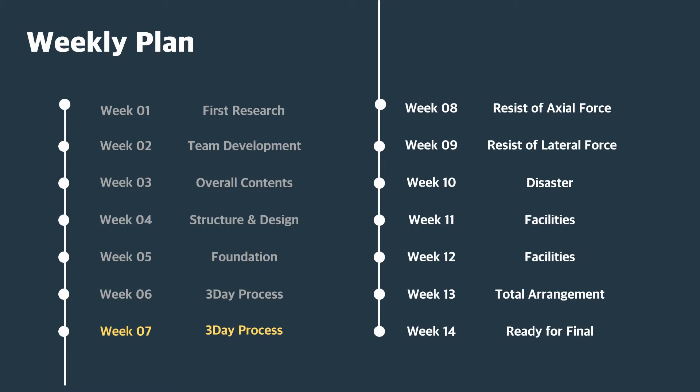Last week, we told about the 3-day process, covering day 1 and day 2. Today, we will present day 3 and the problems encountered when constructing.

This is a summary slide. Last week, we presented the background of the 3-day cycle and the construction method of day 1 and day 2. When constructing a high-rise building, they need a lot of manpower and equipment, so they need a lot of cost per day. Projects should be completed in a short period of time, so a new construction process was needed.

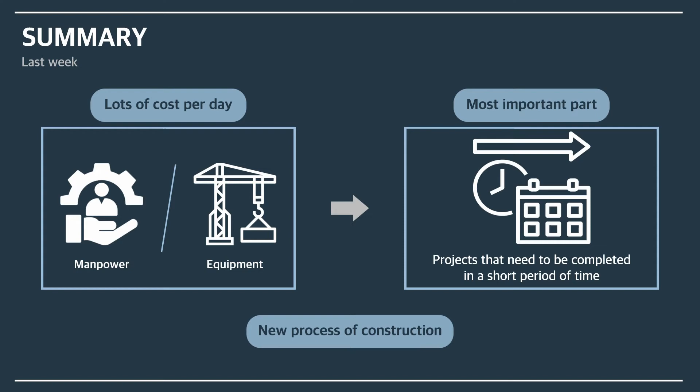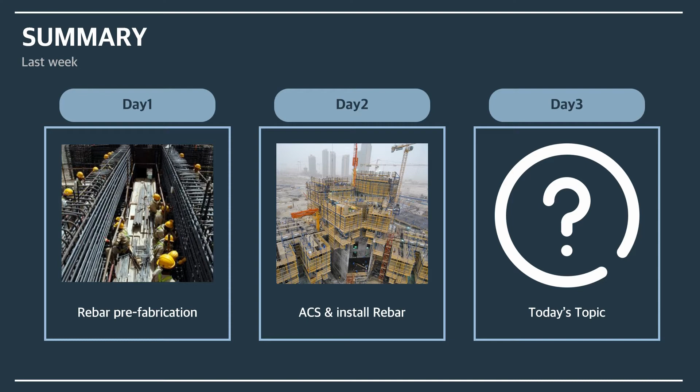As a solution, Samsung C&T's 3-day process was used. This process constructs one floor every 3 days. In day 1, rebar is prefabricated on the ground. In day 2, the rebar made in day 1 is connected and molding is installed using an auto-climbing system. Today, we will present the final course of day 3.

In existing high-rise buildings, they use the winch transportation method, which raises a container of concrete to the middle floor and then uses a pump to send it to the site. This technology was stable, but it took a long time.

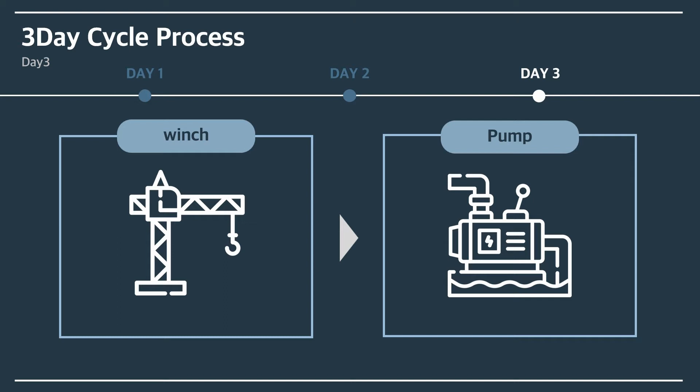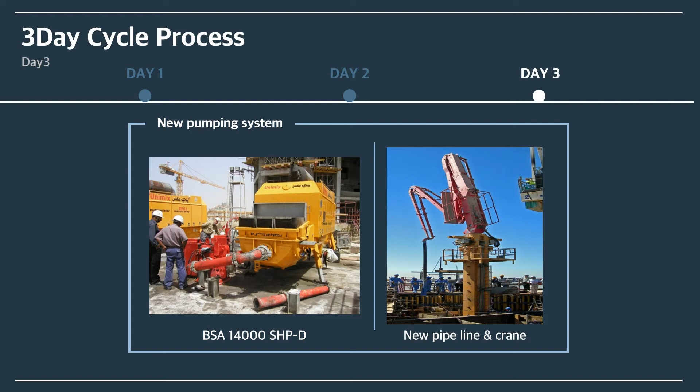Burj Khalifa had to shorten the construction period due to problems with labor and labor cost, and adopted a particular concrete pumping technology to meet these conditions. This technology directly pushes concrete by connecting pipes to the high-rise areas. Direct delivery of concrete had the disadvantage of not being able to shoot it up to the height of high-rise buildings, but the use of cutting-edge technology and special concrete in Burj Khalifa allowed it to be raised to a high level, which had a significant impact on shortening the construction period.

Let's see why concrete pumping technology can shorten the construction period. This technology was more direct and constant than other technologies, enabling prediction and minimization of construction time. We can deliver concrete to the required location, minimizing delay. Concrete pumping allows minimal labor to be used to carry out the entire process of concrete placement.

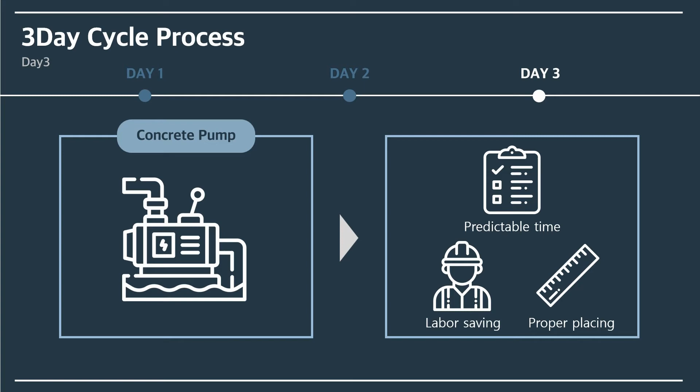From this slide, we will talk about the challenges of day 3. First, the problems that occur with conventional concrete are as follows: first, temperature; second, early strength; third, workability. Construction is very difficult due to environmental effects such as the desert temperatures where Burj Khalifa is located. In addition, early strength is very essential to build one floor every 3 days.

But early strength could involve heat of hydration. High heat of hydration makes cracks, which is fatal to buildings. And in the case of general high-strength concrete, it is difficult to pump it high through piping because of its high viscosity. In addition, mixing it while considering workability to send it up to a high place results in very low strength and the risk of segregation.

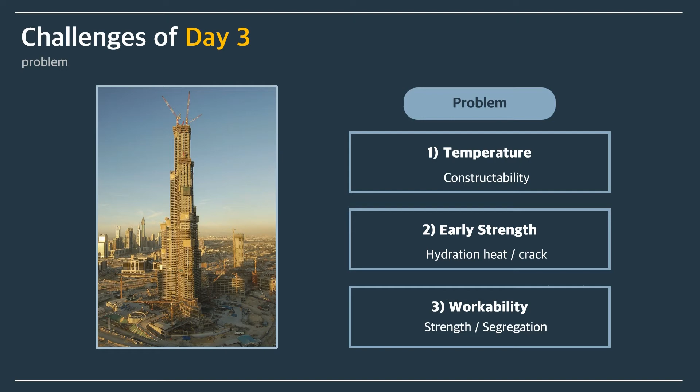So, considering the process of making concrete and construction, there are many things to consider: for example, strength, workability, dry shrinkage, cracks, early strength, segregation, and heat of hydration.

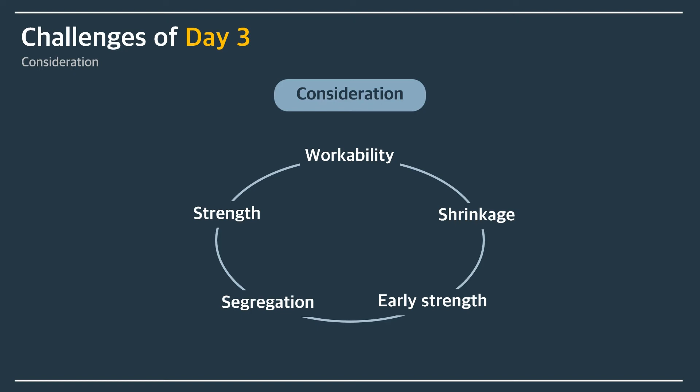Let me tell you how these problems were solved, one by one. First, early strength: the concrete used in Burj Khalifa must be dried quickly, within 10 to 12 hours. Then, the automatic lifting device can be activated. However, as we mentioned in the previous slides, for early strength to be fully exerted, the heat of hydration may increase.

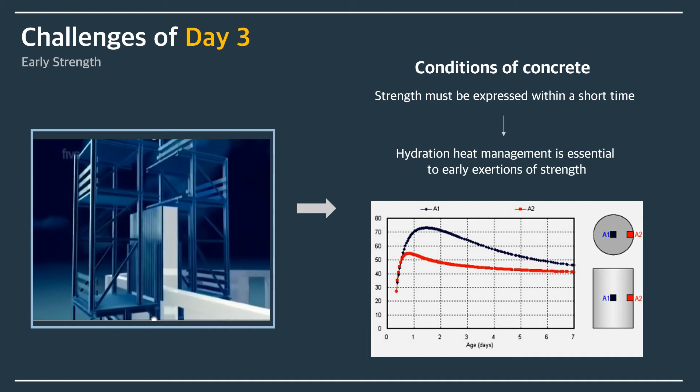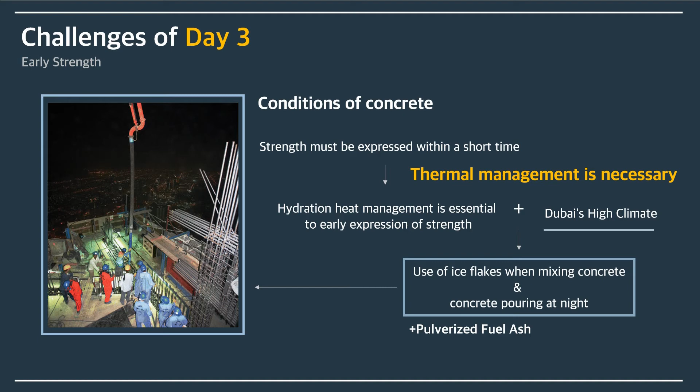Also, the construction site has a very hot climate due to the geographical environment located in the desert. That's why thermal management is necessary. To solve these problems, ice flakes were mixed together when mixing concrete, and concrete pouring was carried out at night. Also, they used fly ash, which is a mixture to control the heat of hydration.

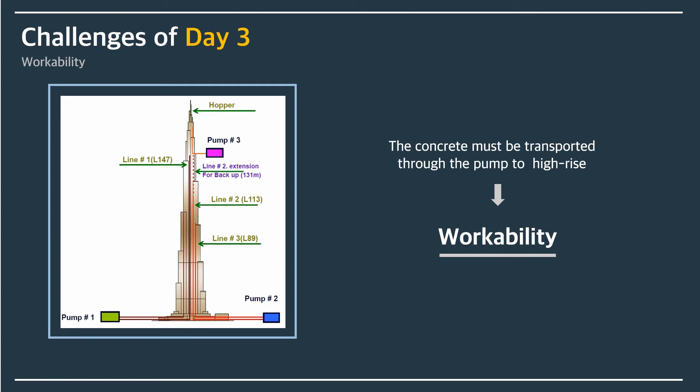Second, workability. Workability is considered to be the most important element of the concrete material properties used in this technique, as concrete is moving up to higher floors using a pump and then pouring down. The workability can be controlled by water to cement ratio. If the water to cement ratio is high, workability is better than before, but the strength is lower than before. To overcome these problems, they get high workability and high strength by adding superplasticizers and silica fume.

Also, the size of aggregate that makes up the concrete was controlled to get appropriate workability. In high-rise, which require high workability, smaller aggregates are used to increase workability.

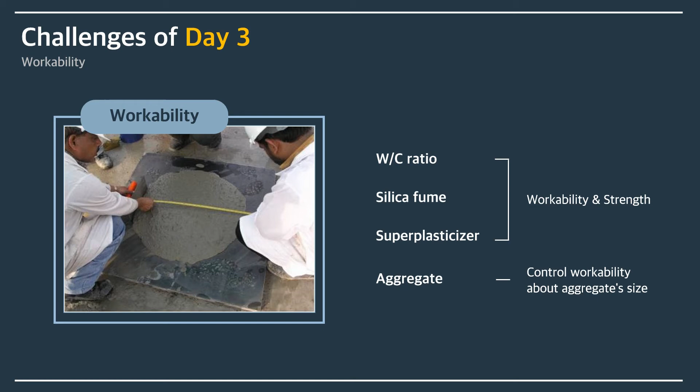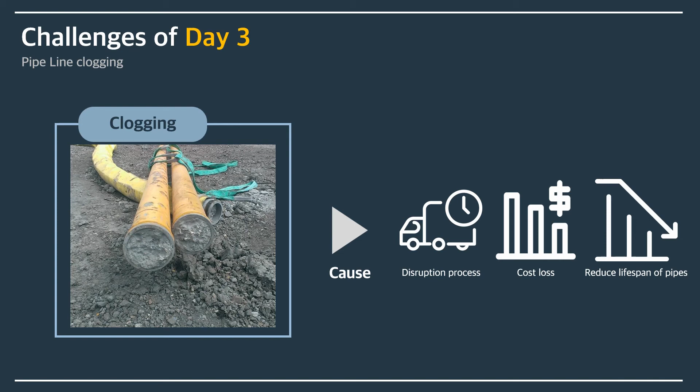And there is another problem about pipeline clogging. Concrete pipelines are frequently clogged when pouring concrete, which causes disruption in the overall construction process, reduces the lifespan of the pipe, resulting in significant cost loss. To prevent clogging, concrete in the quantity needed was poured at a constant rate. Despite this, a high-pressure washing machine was prepared next to the pipeline in preparation for clogging.

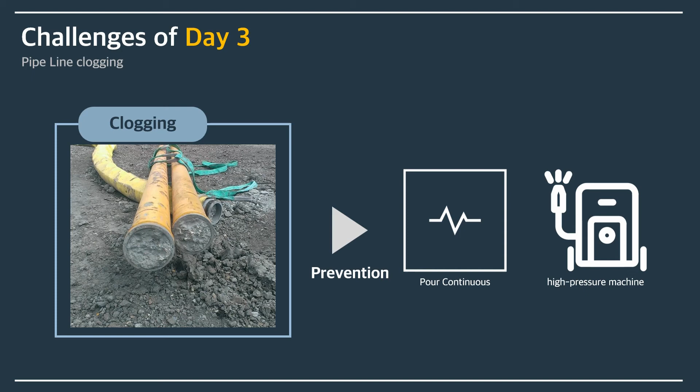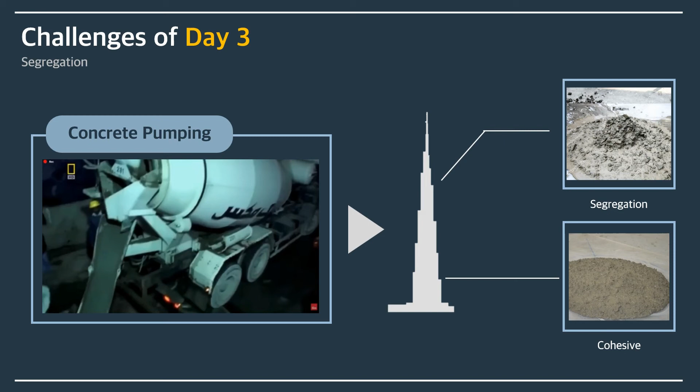Pumped concrete is delivered, and segregation occurs due to density difference. The higher the transport, the more time the segregation takes to occur, and the greater the segregation. The result is lower-strength concrete than the expected strength.

As a solution to segregation, the tower crane raised the concrete to a repumping zone, located at 525 meters, and sent it to reduce the time of segregation. This method is a combination of the existing method, the winch transportation, and the concrete extrusion method, which reduced the segregation.

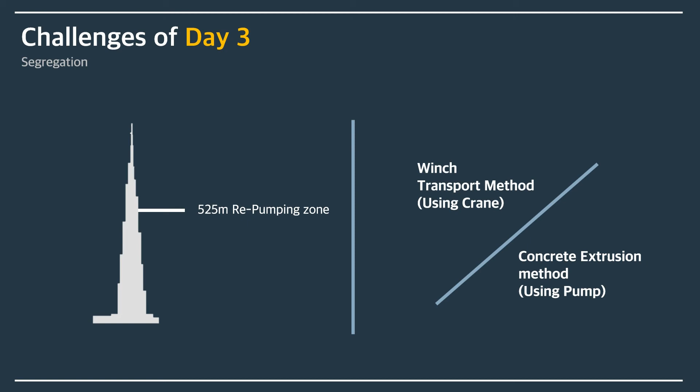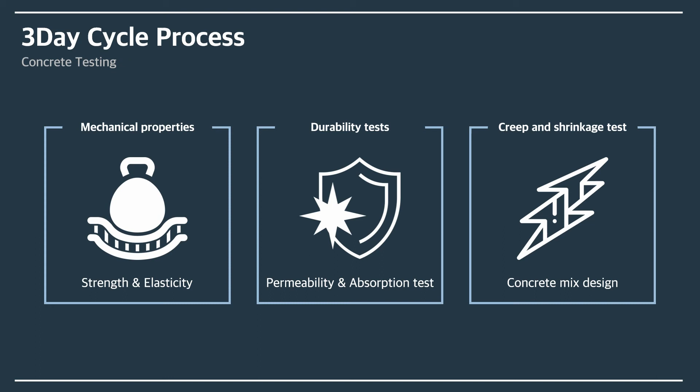To secure building stability and safety, many concrete testings were conducted. For example, mechanical properties, compressive strength, modulus of elasticity, durability test, permeability test, absorption test, creep, and shrinkage test. Also, other tests were conducted, for example, mock-up test and pump simulation test. These were carried out under the same conditions as the actual structure to ensure safe construction.

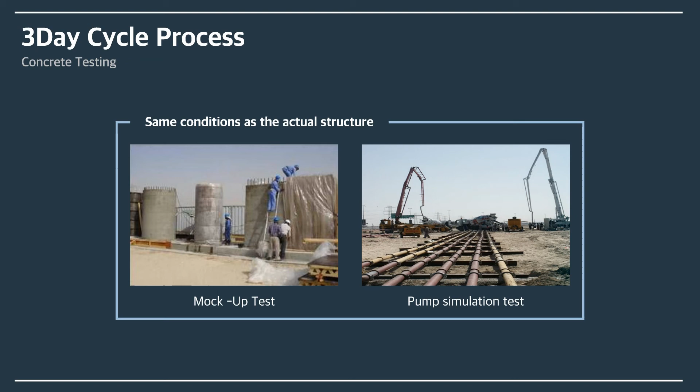So, you may know the construction method of Day 3 and details about the concrete used, construction problems about concrete, and solutions. After concrete strength is exerted, one floor is constructed, and the Day 1 process is repeated again. This is the 3-day process cycle.

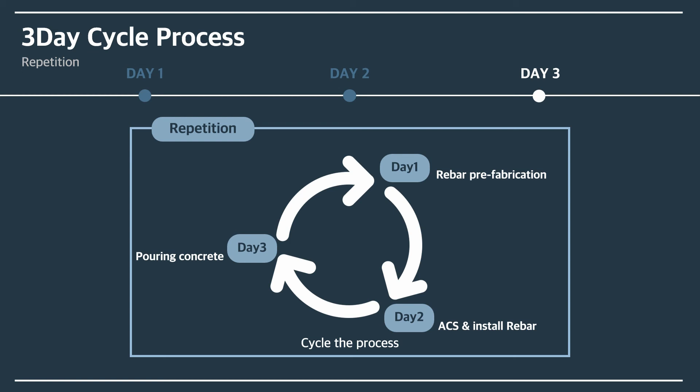In addition to the 3-day process, there are other problems in the construction process to pay attention to. So we will briefly tell you the problems to be dealt with in the future, such as the resistance method of various basic loads and the facility to be installed inside the building.

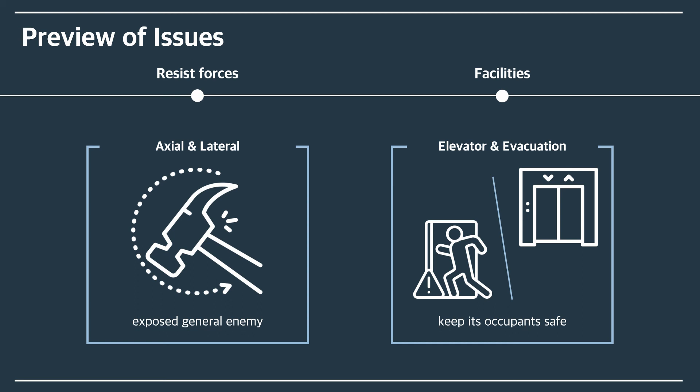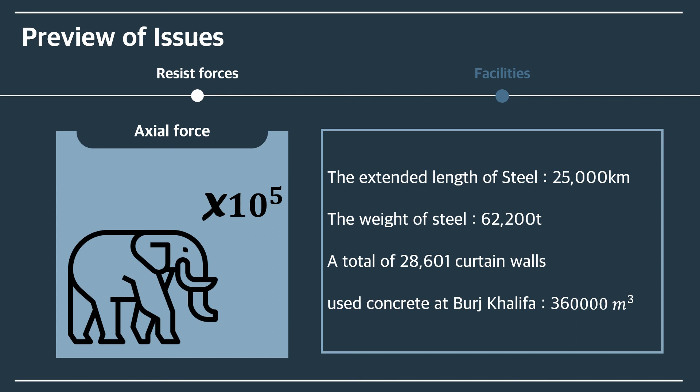There are many interesting issues in Burj Khalifa. Total material weight of about 540,000 tons were used - its weight same as 100,000 elephants. Burj Khalifa had to have a special structure in order to resist a huge amount of axial force, to minimize weight and maximize floor area.

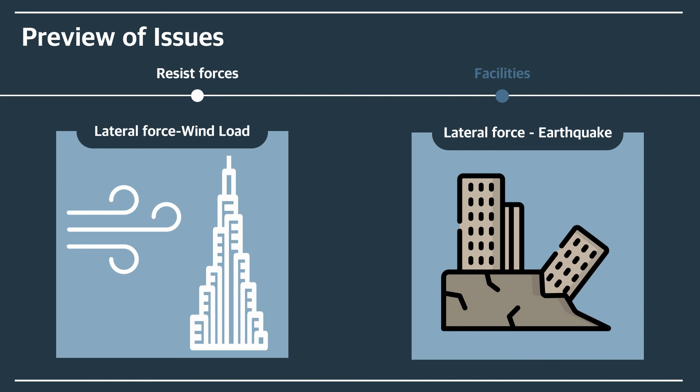Also, there are other issues about lateral force from wind load and earthquake. First, wind load - the higher the height, the greater the load inflicted on the building. Second, earthquake - Dubai has had about 7 earthquakes in the past year. So Burj Khalifa comes up with a unique way to resist this load.

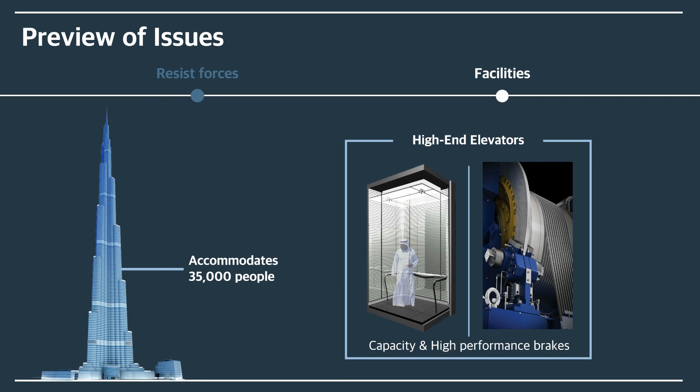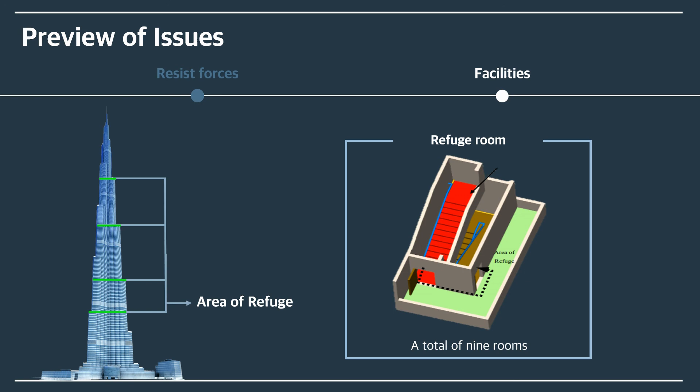Next, we will talk about issues of facilities for occupants. The Burj Khalifa took the idea of elevators to its extreme, as it accommodates over 35,000 people. Now, the final technological leap of the world's biggest building is to keep its occupants safe. It was difficult to evacuate all the occupants to the first floor, so there are refuge rooms to ensure safety. By securing stability, they can get safety.